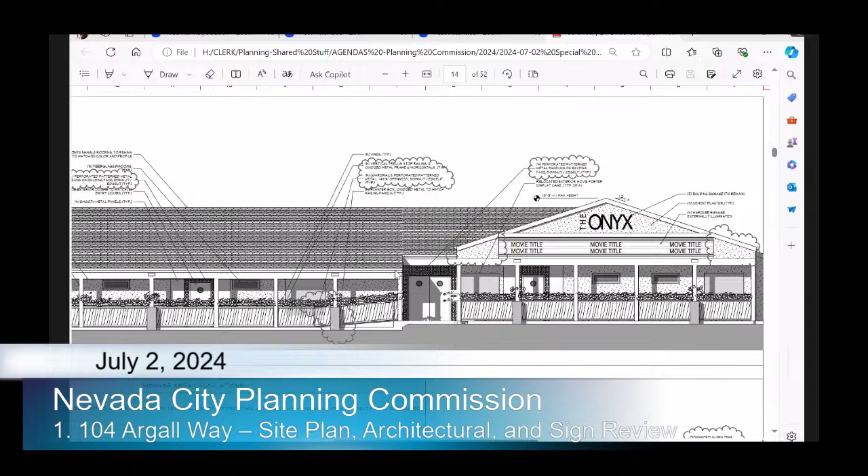Okay, so I'll go back for the architectural features. This rendering here is where the perforated panels will be, that's the moss branching pattern. The visual effect of the rendering kind of makes it look like vertical members, but that is proposed to be the moss branching pattern. And then here, where the plants are growing, is the horizontal pipe sort of feature. So moss branching pattern up to 36 inches, and then 10 or 12 inches for this feature.

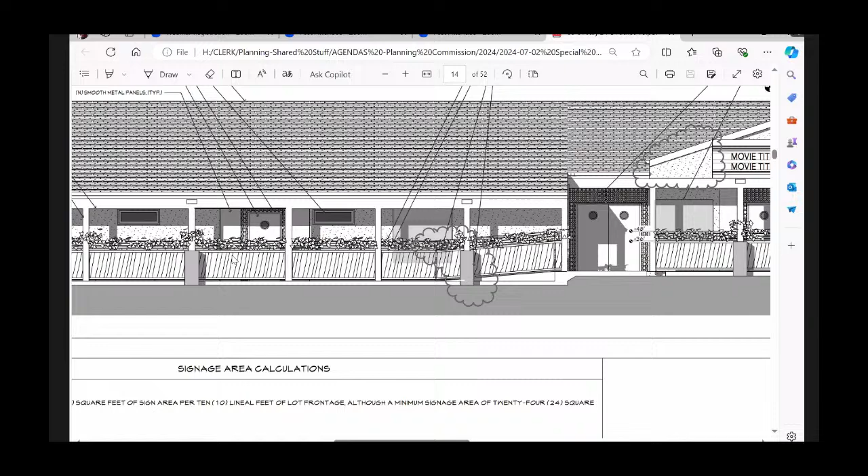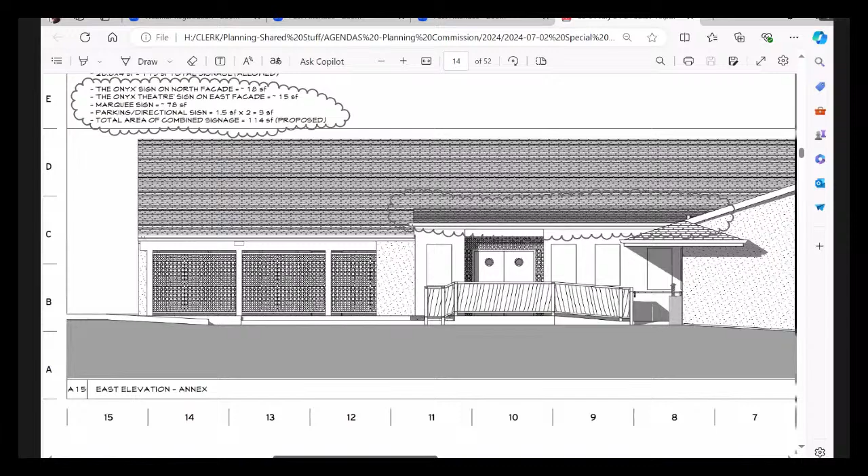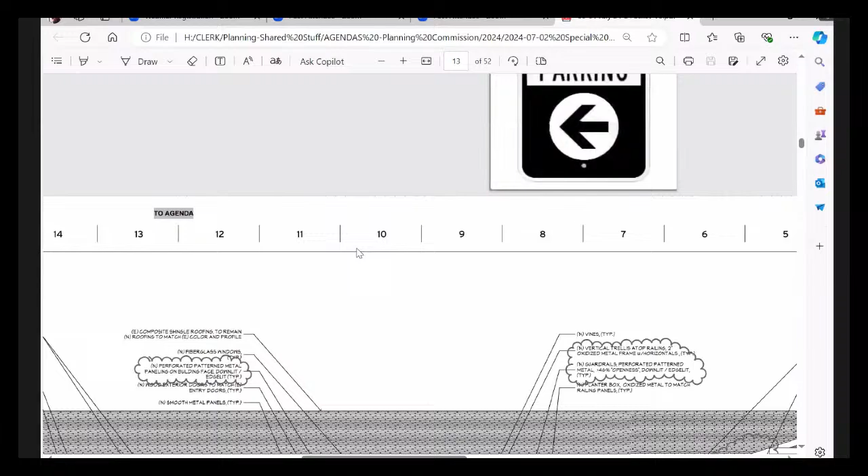And then the other geometric pattern, as we discussed at last year's meeting, is proposed for here, which is a tighter weave, similar to the previously approved one. So that would be there, and then also on the building here, next to the doors. There would be downlighting proposed above this, and then on the wall would be this effect.

And then what I was referencing for the roof - this is the visual effect of the pitch break on the Searles Avenue side. It would just make more headroom when you walk inside. And that's an ADA entrance, right? It has a ramp going up to it as well, yes.

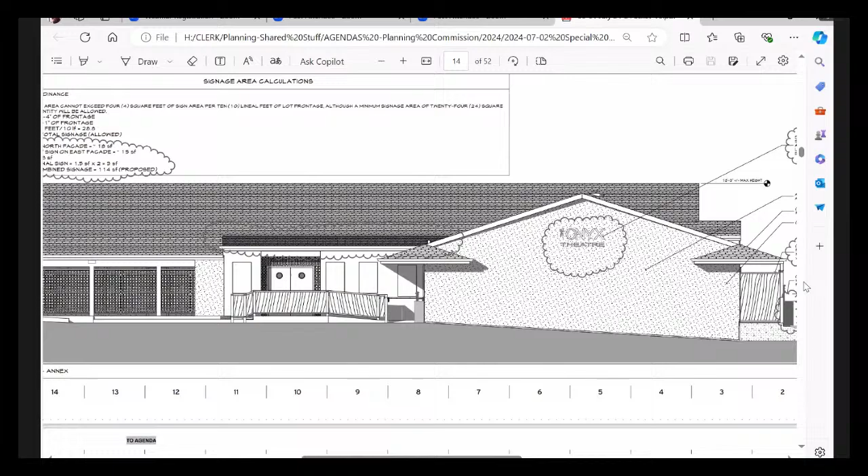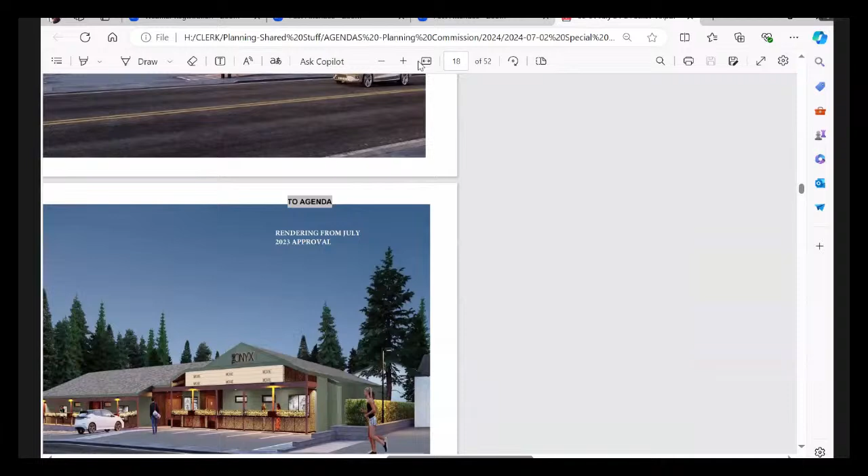This shows the roof that comes out from the gable end. So this is a nearly flat roof that connects in with the existing roof. And it makes it so the marquee sign sits not flat against the building, but out more over this covered entry area. So this is the way the architecture here was approved last year.

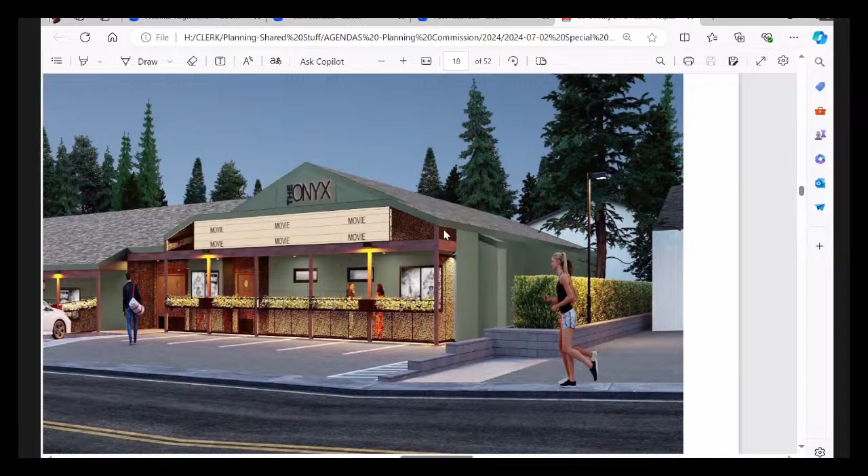I'd like to throw in that my recollection was that the structure containing the marquee was not decided as part of architectural review at that time, and that we would review it when the sign application was complete, and how the new sign marquee is contained and supported would be considered at that time. That's my recollection, and it's probably not in the video, but I'm just saying that might be open for discussion. I'm not sure, I'd have to look back to see if it was included in the motion or not.

I have zero recollection of a popped-out wall discussion. Well, this is the rendering that was submitted last year, not recently. It's like a roof that goes from the overhang to the gable end wall, you can sort of see it here, how it connects to that existing roof. I cannot see that, can you zoom in more? It's more the perspective of the drawing and the colors that's not obvious to me. Like an actual plan or section would show me, but I can't say the picture does. I can't see it.

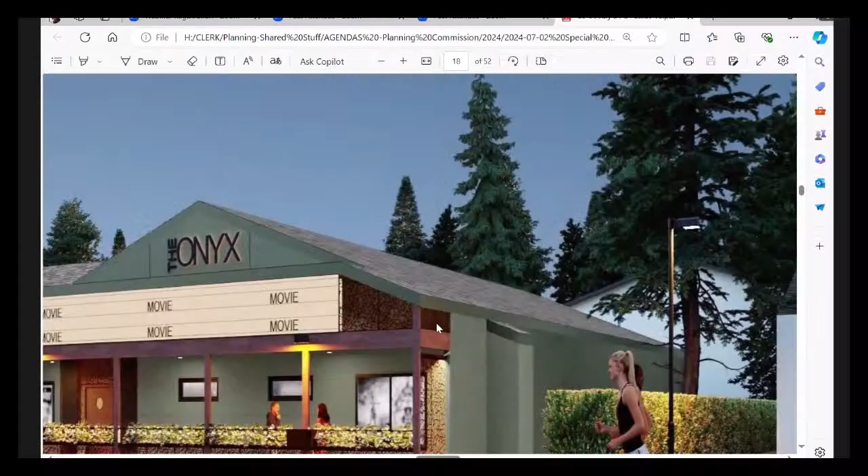But the change that's proposed - you'll see here that this was previously the metal branching pattern, so now it's proposed to be stucco here. I'm guessing, and I'll let the applicant comment, that stucco would continue over here. Is that right, or would it just be a stucco face? And then would this be open or? I think it would be stucco along the side there, wrapping as well, yeah. Okay.

Actually, I like the picture because of the whole total look. The downside is we don't have construction. Do we have dimensions?

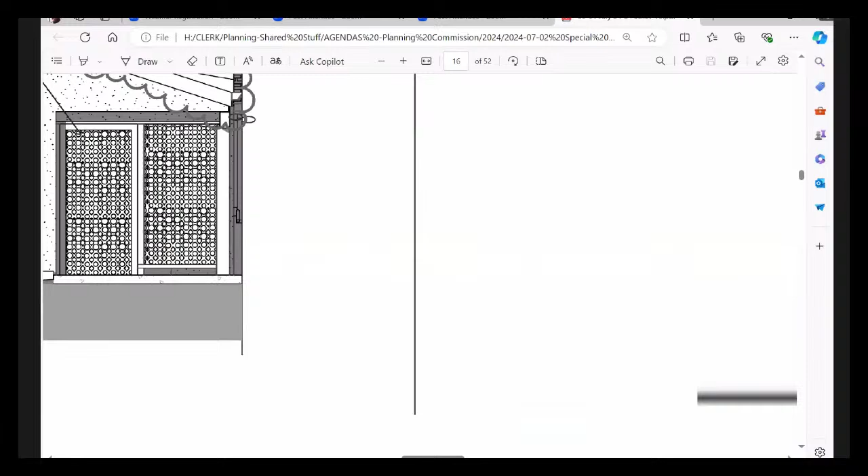Those things have got to be constructed, and somebody will have to follow up and sign off on it. And what are they signing off on? It's hard to sign off on a picture. I'm just talking about the front scape that we just saw, that picture. I guess I'm getting at, are you concerned about the sign size?

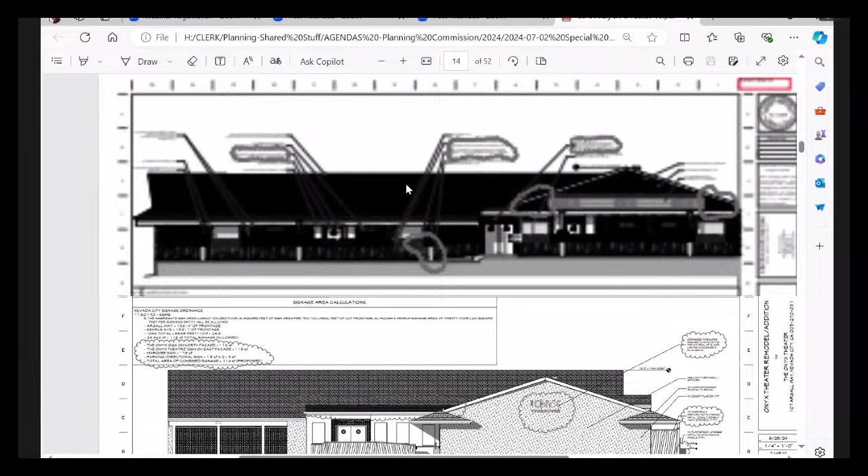Commissioner Van Zandt, I might also point out that this illustration, and ones like it, are in your packet. It's got dimensions. There's also a detailed view, a section of the sign itself, on sheet DS1. It's a very schematic section, but it shows the cove channel, it shows the illuminated LED strip light, and then it shows the aluminum channel letters. So it is a section.

So yes, the sign review today is for the marquee sign, a new Onyx Theater sign on the east gable end wall that will integrate with the proposed mural, and a freestanding two-sided directional parking lot sign near the sidewalk on Searles Avenue to direct folks to where they can park at the theater, since it is not currently theater parking.

The existing sign facing Argall Way will remain in its current location, or be installed once construction is completed to the exterior of the building. So my review of the signage included all of those signs: the existing sign, the parking lot sign, the marquee sign, and the new sign on the Searles Avenue gable end wall.

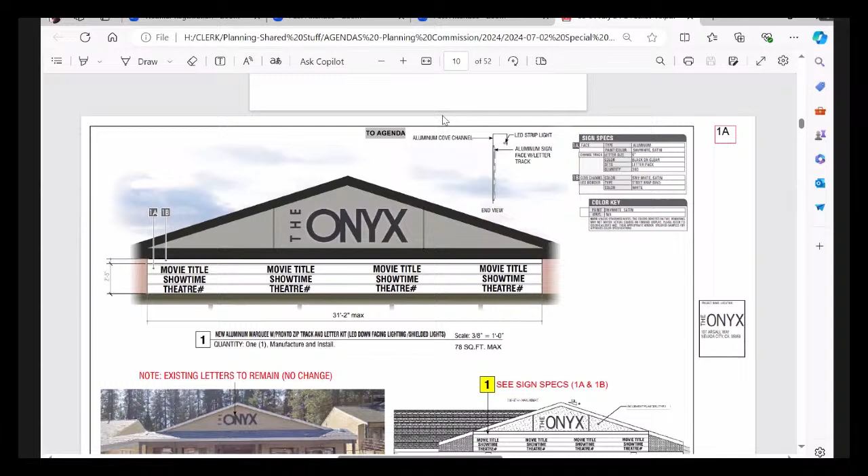Basically, there's a detail here, I'll zoom in on it. It's called a cove channel. So if you envision this being the marquee, a cove channel would be like a metal bracket sort of thing that would come out and down, and then lighting would be proposed inside of that, so it would be fully shielded.

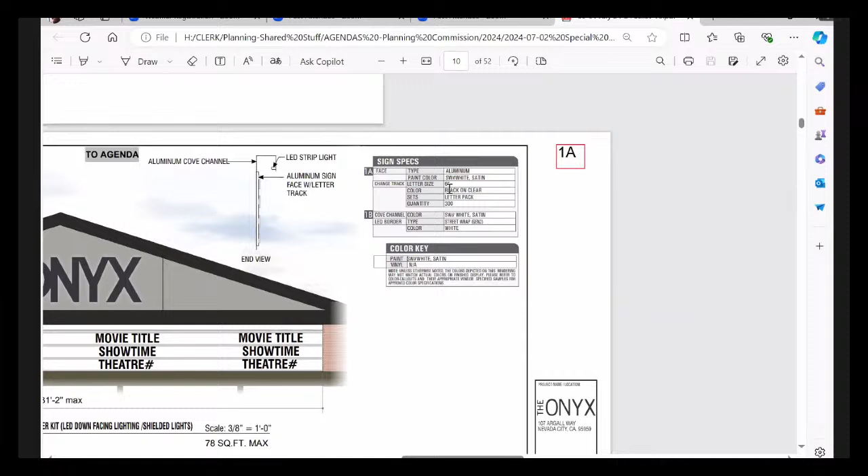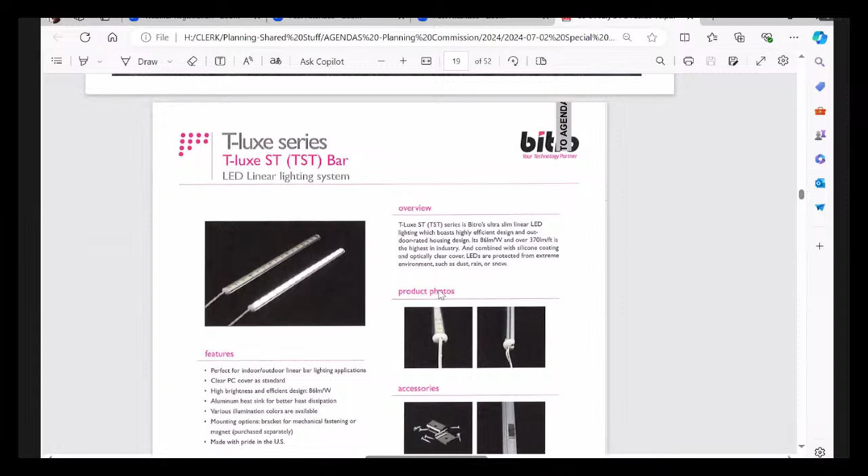Then the applicants did provide a sample light for the marquee. I'll get to that here. So that's this T-luxe series LED lighting system, in your staff report.

And then this new sign on the east gable end wall is proposed to match the style of the existing sign on Argall. The area of that new sign is 15 square feet. And then the directional sign in the parking lot is 1.5 square feet on each side, a 2-sided sign.

A question while you're right in there - is the new Onyx sign the same size as the other one on the other gable end? Are they the same size? No, this one...

I don't have my notes in front of me, but I can't recall. Chris, do you know? It's a little bit smaller - the new one on the gable end is smaller than the existing, but it'd be the same materials, same standoffs.

What we've done on that new sign is we've added the word theater underneath it, so when you do basically an area rectangle around the new sign, it's very close to the overall size of the existing sign. There's a summary on page 14 of all this. We wanted to make the sign bigger, but we were limited by the allowed area of signage.

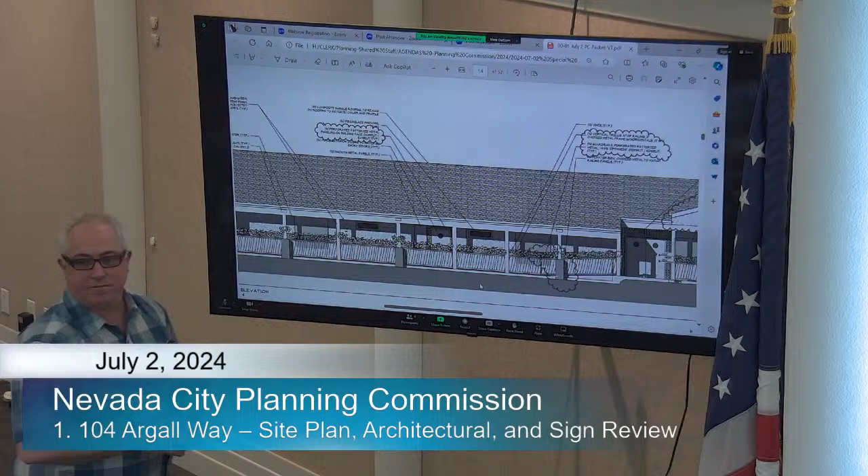Will the smooth metal panel be the same color as one or the other? I think it's intended to be a gunmetal gray as previously approved in the past. And the same finish for the perforated panel adjacent to them? Actually, the perforated panels are intended to be a weathering Cor-Ten finish, so they'll have a little bit more of a brownish, kind of rusted appearance, so slightly different.

We managed to find a manufacturer who can make those in panels and put in the dimmable LEDs inside it. We were sort of working with a custom fabricated thing, but we seem to have found somebody who can help us out with that. So dimmable LEDs at the top and the sides, for the doors, for the door surrounds, those door systems.

But that said, I am glad to answer any questions about the project, and again, thank you for meeting to discuss and review this. Okay, thanks for clarifying, and if anybody has questions, we can start from Peter's end. I'm good for now, thank you.

I did have a question about the color temperature on the lights. I saw on the tubes, I think there were several color temperatures there, and I think the warmest one was 3,000 K. Later on, I think you were specifying a 2,700 K light. They're both on the warmer end, which is great, but it'd be great if you had the same color temperature on those.

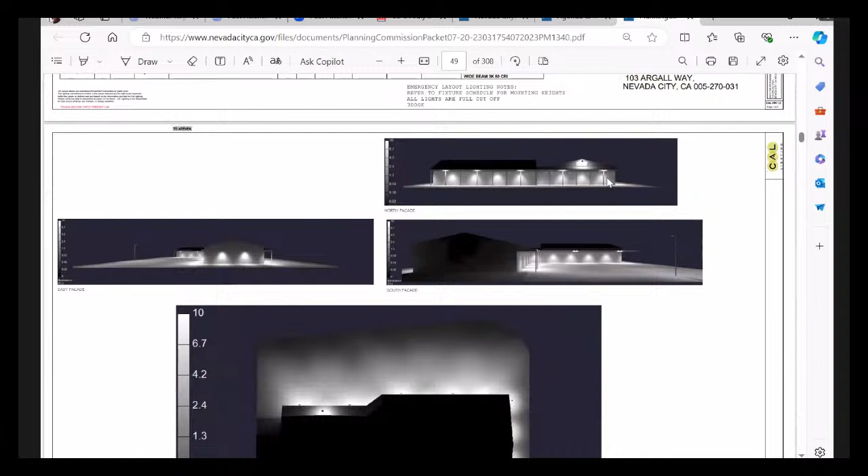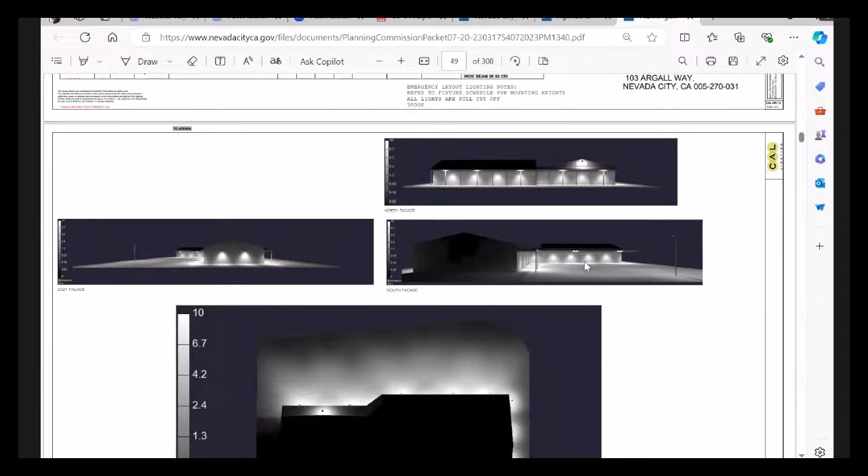So this shows all the different angles here. This will obviously change because of what's being submitted in the mural application - this wall changes, this one changes as well, to ones that are hidden. Chris, I don't think we're still showing fascia mounted lights on that one portion, because now there'll be ceiling mounted lights on the overhang that illuminate the three new planters on that elevation I pointed to. This will no longer be the case either, this one here - that one was an attempt to light the marquee label.

It's just these ones that are on the fascia. Right, it's coming back to me. I remember we discussed the possibility of parking lot lights on the street side. We went through that, and it was determined from your end that lighting as shown was...

I'm sure it's in the approval, but I'm recalling that it was parking lot lighting on the street side shining inward versus this. Yeah, we weighed all that out. Just rebooting myself on it.

So to recap exterior lighting: there are lights in the ceiling of the porches, and then those shown in the elevations above intermittent posts, and that's it for exterior lighting. This is now reminding me that there is a freestanding light on that south property line over those parking stalls. Correct, so there is one freestanding one.

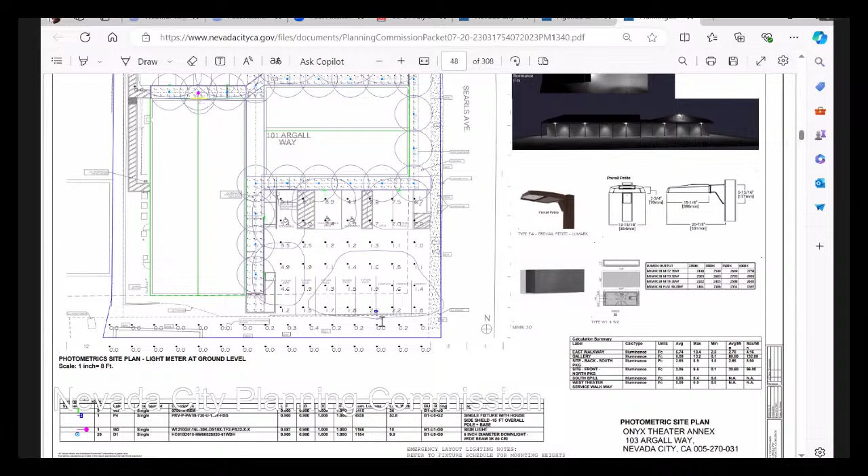Oh okay, and there's other lights on the outside in the mural application. We have some added lights on the very top of the gable facing the sidewalk, intended to be inside the overhang of the roof, so they're not visible from passersby, but they'll be illuminating back onto the mural.

So for your previous approval, there was some lighting submitted here, but from what I'm hearing, what's being proposed may not be this, right? That appears to be the ones that would be in the soffit, like over the seating areas of the patios. Correct, just looking at the design of it. So those would still be in the ceiling above, like the seating areas in the patio.

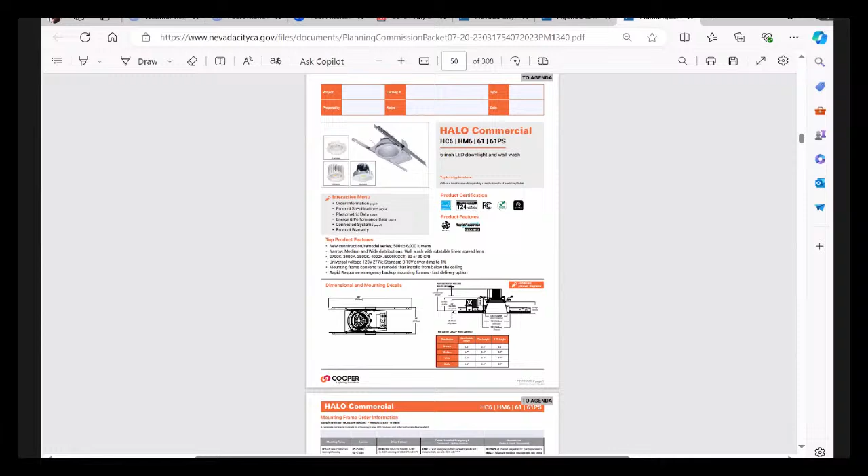Okay, that particular light right there. So ceiling mounted lights, and which others can you- I know the gable end mural lights. Correct. And there's one more, the parking lot light. Yeah.

And then there's the light hidden in the eaves that shines down on the south wall of the east wing facing the parking lot. Which parking lot? The parking lot on the south side of it. The backside, yeah. Shining down, hidden within the eave, but shining down between those planters.

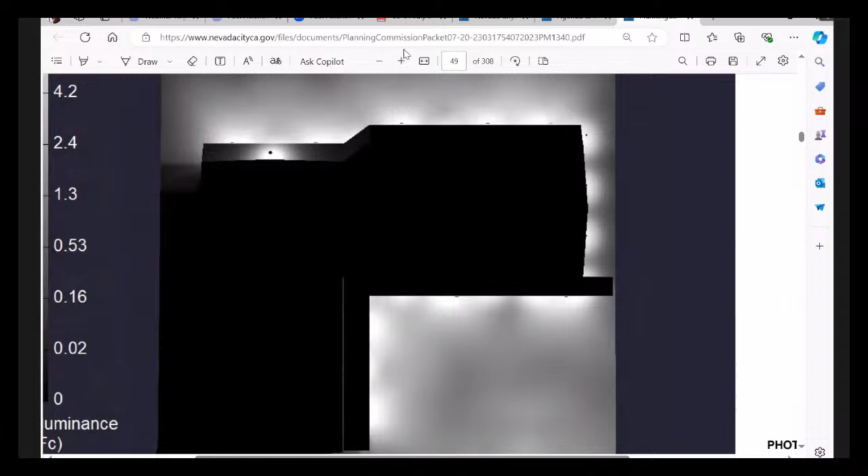And the east wall, the entry, right? East, that's the proposed mural side, correct? No, actually that's the mural because the mural goes up on the side that's up into the sidewalk. Yeah, this, so this is the mural side right here.

Right, this is where we actually have two little roof soffits that come out. There'll be downlighting in those. And then this, the mural's there. This is where there'll be some linear lights up here in this overhang of the roof, projecting back towards the mural that's on that wall.

Over here, there's an entrance and there's a recessed entry, basically a vestibule, and there will be a ceiling light similar to something like this, like you have from the Sumo place that was down there, that's over that door as well. Under the roof, all the lights are under the roof.

If that helps - yes. So I think you should be clear with conditions on the lighting, as far as timers, and maybe even stating a change in the previously approved lighting plan to the new proposed lighting that's now proposed: the ceiling mounted lights, the eave, and the special lighting for the gable end wall mural.

Can you add that to any motion that comes from us? Can you add that, or shall we? Yes. It seems mostly consistent, but it seems like it's been just kind of brought down a little bit to me. Does that seem right to you? As far as the brightness, yeah.

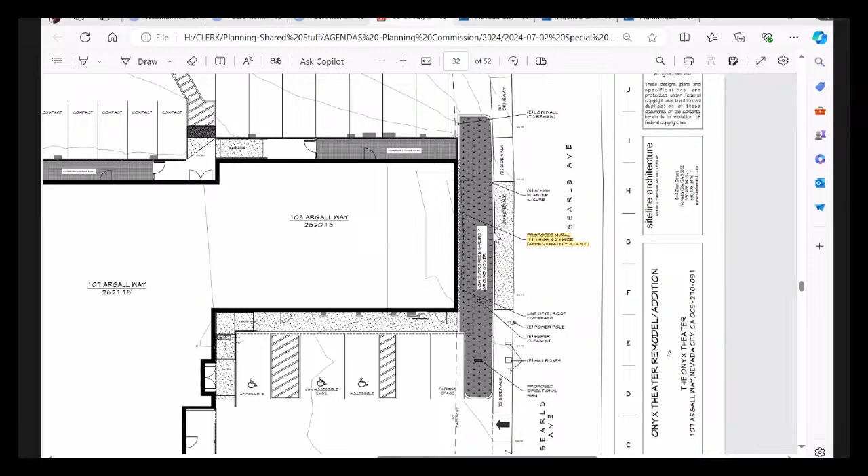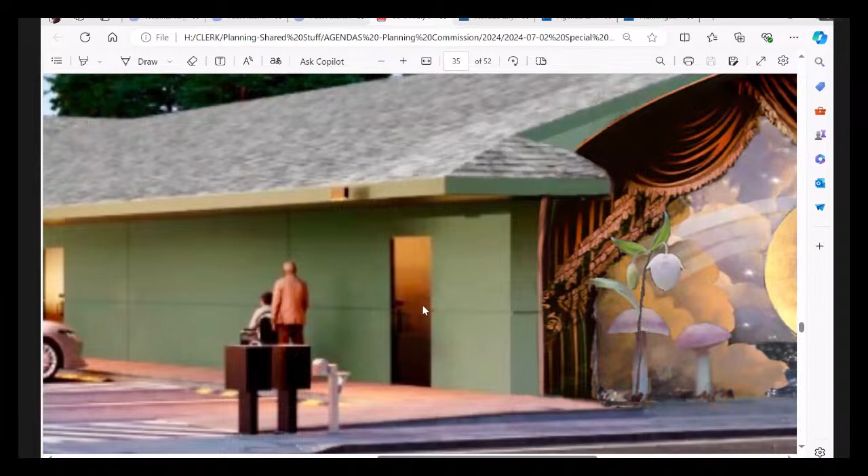So it's separated by this landscape strip and the sidewalk. This site plan isn't the one that shows the boulders and the concrete pad here. And I will let the applicant take it from here.

Great. Are we talking about the landscaping as well for this, at this time? That was included in the previous last approval, the motion included that, yeah. Well then, so here we have the mural.

It's a beautiful mural. We have Sarah here to talk about it a little bit and discuss her inspiration, and my understanding is that we're presenting this here to discuss the materials, the construction, and the maintenance of the mural, because it's already been reviewed and approved by the PAC. Our understanding of our mission here is not to talk about the content, which is beautiful, but only its framing, its lighting, its appropriateness in its architectural setting.

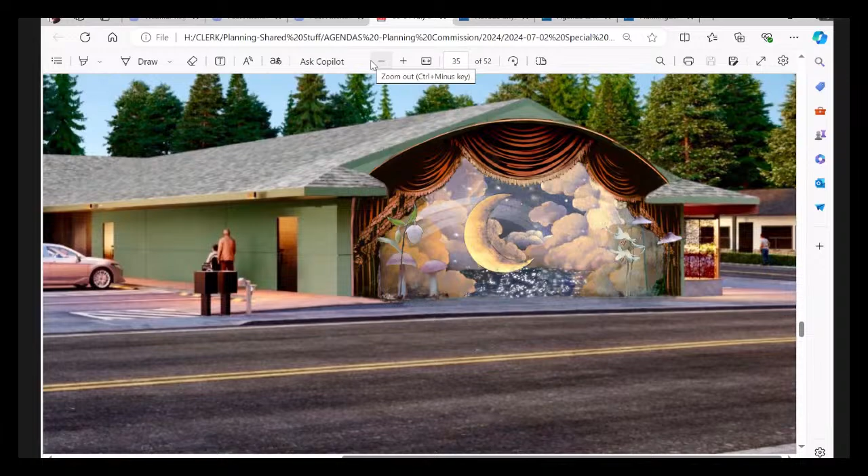Okay, great. So I'll let Sarah speak mostly to this, but I will mention, as we discussed before, there is illumination proposed for this mural. The rendering you see here is a little bit flat, initially just limitations of the software, I think, but the ridge right here, this piece of the roof that's highest, actually does stick out a little bit further and then cants back into this portion.

So there's a fair amount of overhang there—about 24 inches of overhang from the face of the gable to the end of the ridge. Up there is where we have some illumination lights; it'll be up inside the soffit, hidden from view, but projecting back onto the wall. There is a third light, an additional light that's actually mounted to the gable. It comes out on an arm, has a shield, and then is directed back again towards the sign.

We were asked to present one image of the mural without the sign, so that's what we're looking at here, just for the sake of clarity, to see the mural content. Then the third portion of illumination for the sign is that in these little end returns of the soffits, there'll be an inset ceiling light that'll be casting down.

That said, I think Sarah probably has some wonderful things to talk about with the mural, but I'm here to answer any other questions. Thanks.

I feel like a lot was kind of covered by what Lisa said. This intentionally has kind of an antique-y vibe, which I know will make a lot of people happy in the community and on the various boards and committees. I also just think it's what needs to be there and feels really appropriate.